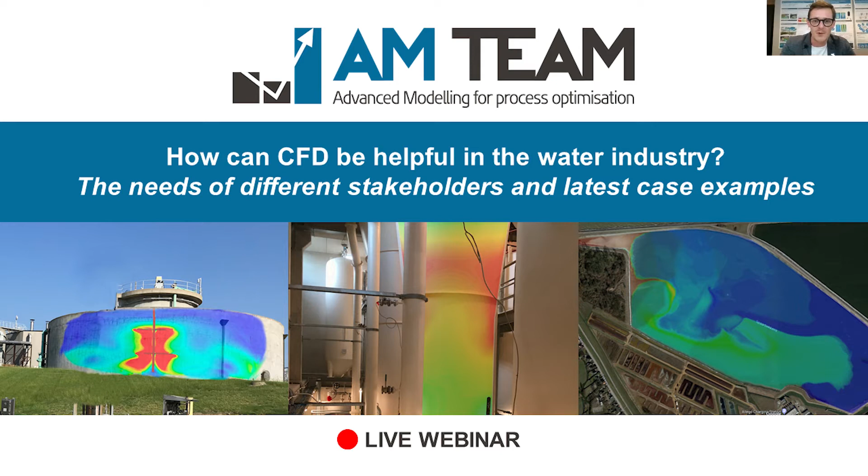Of course, what is also very important is that we show you the latest case examples. This is very valuable to inspire you with what is actually possible today. So this is a live webinar - this is no fake, it's real stuff, so we can actually interact live today.

So what are today's objectives and content? Just to put the expectations right - what is the objective? By the end of this one hour webinar, you know how CFD can be helpful for your case. This is actually the why - why should you be doing it, or how can you actually benefit from CFD, and who?

This means depending on the target audience you belong to, the target group, you might have different benefits. You can also make best use of it in your specific situation, because maybe you're in a design stage, maybe you want to optimize something, you're scaling up a process - it is very different. So these are points we will be addressing in this webinar.

The target audience is actually non-CFD experts. We know we have a couple of real diehard CFD fans here - well, just get inspired by the applications, but for the details on the models, more details on the cases, I would really recommend you contact us or go to our website and read our blogs, okay? So this is all about the applications, and we will not really scare people away here with formulas.

What is the content? We will discuss the needs of different stakeholders, some common misconceptions and must-knows about CFD. We interact daily with the industry, running a huge amount of CFD projects at the international scale, and we see quite some patterns. We thought it was very important to bring forward these patterns and address some of these big misconceptions.

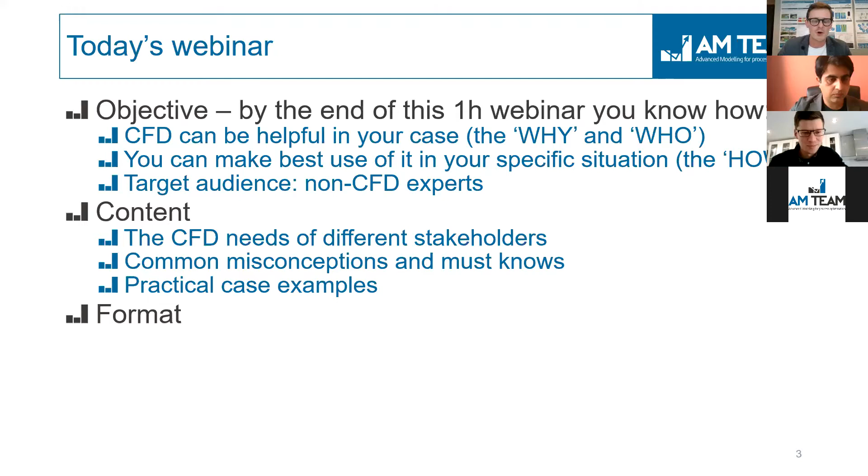The format is slides, so this is the slideshow. We will have a couple of presenters and one moderator, and we will have live Q&A.

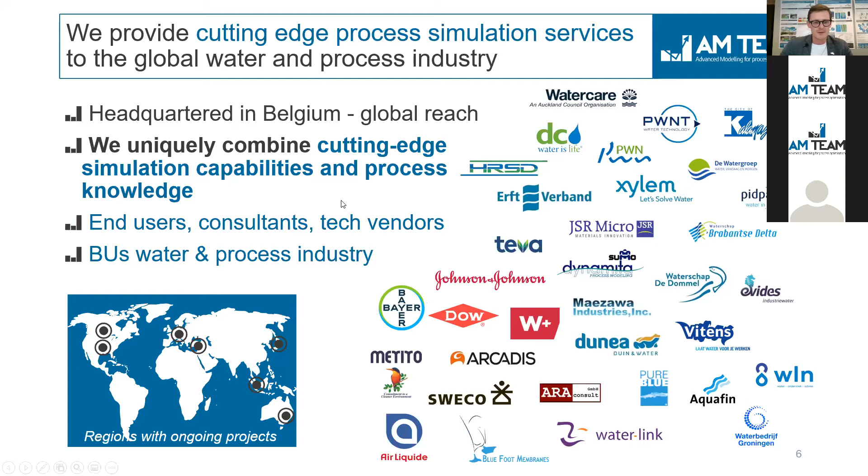So our customers are all over the globe, as I mentioned already. Nowadays, in this digital era, it's very easy to actually work remotely. Okay, let's enter the content here.

CFD easily explained. These are some basics that are really fundamental for you to get everything we will be touching upon in this webinar—we have to start with the basics. You should have a basic understanding of what CFD is. CFD, Computational Fluid Dynamics, is actually a physics tool by heart, so the core is really physics equations. We will not put them on the slide here—they are quite sophisticated, but luckily there's very good software to solve these equations.

It's not a trial and error process. What we mean by that is it's a physics model that is by nature quite accurate if you apply it properly, and then you can structurally apply it to get to your goal. One example on this slide is an existing system. At the left, this is a wastewater treatment plant. It can be any system—drinking water, storage basin, whatever. In this case, it's a reactor. It can be an existing or a non-existing system, because the reactor doesn't have to exist.

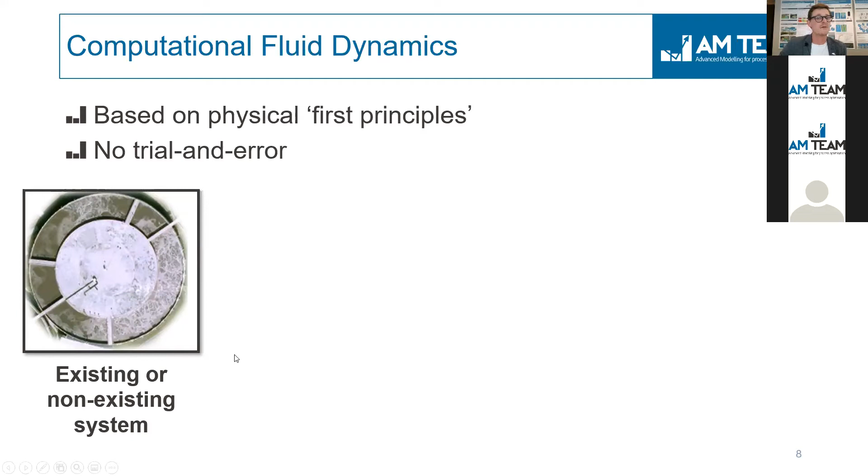The first step you do is build a 3D geometry. So you construct a 3D geometry that is quite simple actually, it doesn't need a lot of input to make. And then you include the relevant elements. What are the relevant elements? Inputs, inlets, outlets, aerations, aerator locations, mixers if there are any, etc. These are the critical elements.

Then we mesh it, so we divide this reactor into little cells. For example, if your reactor is 1,000 cubic meters, and you have 1,000 cells, the average volume of one mesh cell is 1 cubic meter—that's how it conceptually works. And then finally you get the nice colorful drawings most of you are probably familiar with. It's the output, and the output can mean different things.

It can be the most conventional output, a dead zone, velocity vectors, but it can be 3D concentrations of oxygen, ammonia. It can be particles, sludge, gas holdup, viscosity. It can be lots of things, actually. But we will not go into detail in this webinar because this will lead us too far. We have a lot of webinars and other content on our website if you're interested.

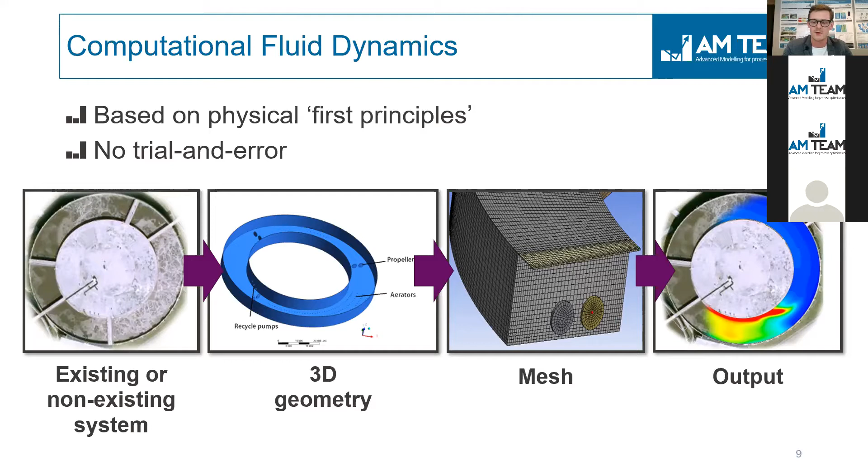But this is the interesting thing when you look at CFD. When you have this output, you see things that are not optimal. In this case, you can see there's a red zone. Actually, this red zone indicates local high dissolved oxygen. It's all concentrated at one spot. You don't want it there.

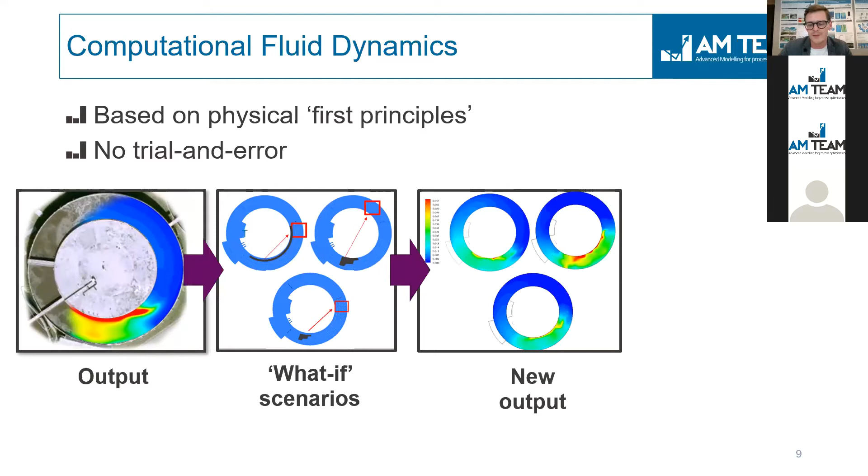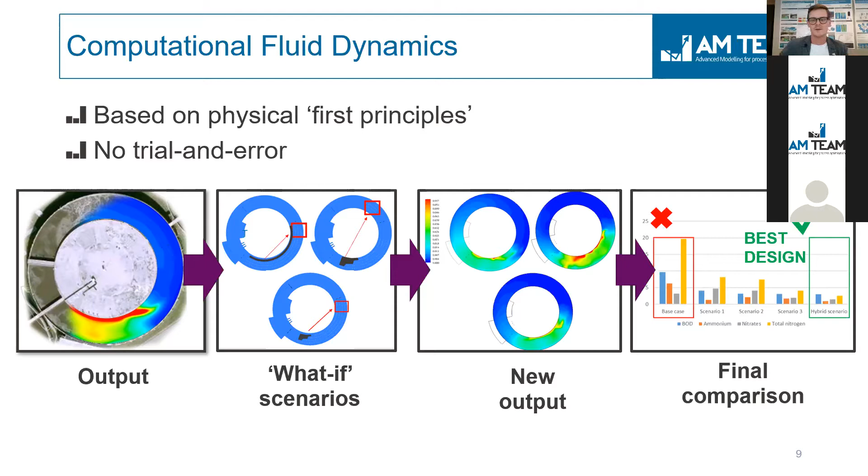So you can do what-if scenarios while not having to actually do any modifications or tests with your real system. And then you can do, again, some simulations and visualize what's better. And finally, you find the optimal solutions or the final optimal designs that can be brought into practice. This is conceptually the core of the value CFD brings: testing flexibility and being able to really understand how you can properly design and operate your system.

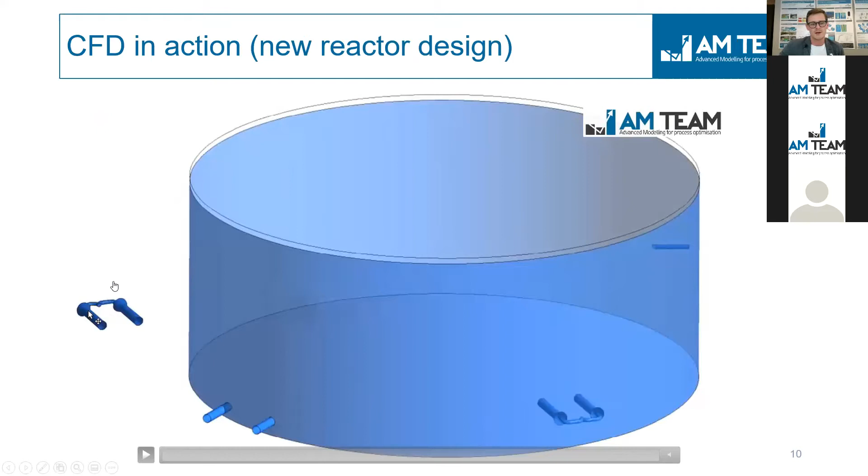Let's make it very concrete and start with a very, very easy to understand example. This is a bioreactor, circular one, and we are putting in some pure oxygen aerators. In this case, they are Ventoxal units, from Air Liquide. There is one pair actually, one here, and we will put them in. We put them in the system, and then it's a 1,500 cubic meters reactor. They inject oxygen, and let's look at the velocities.

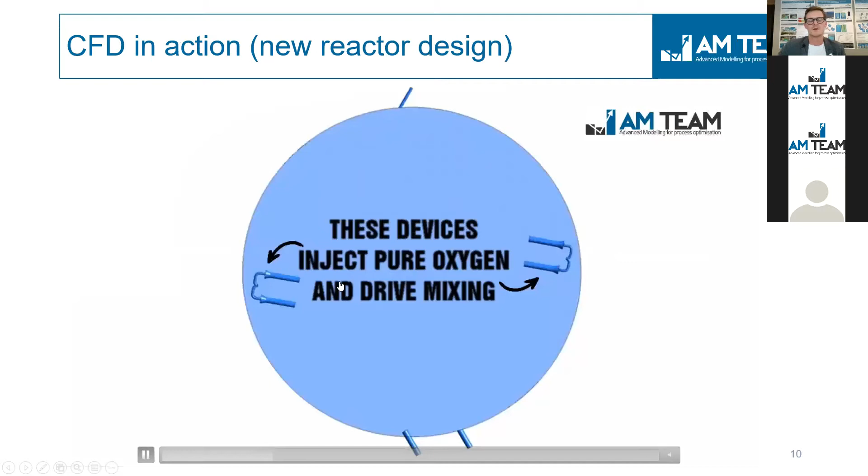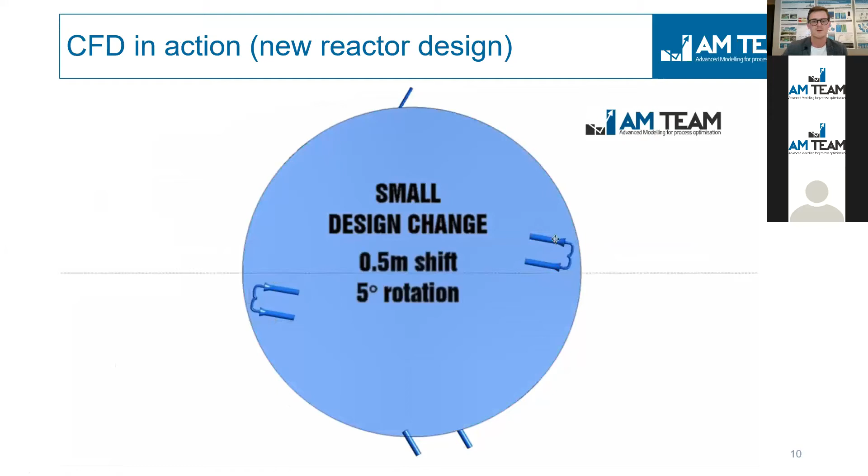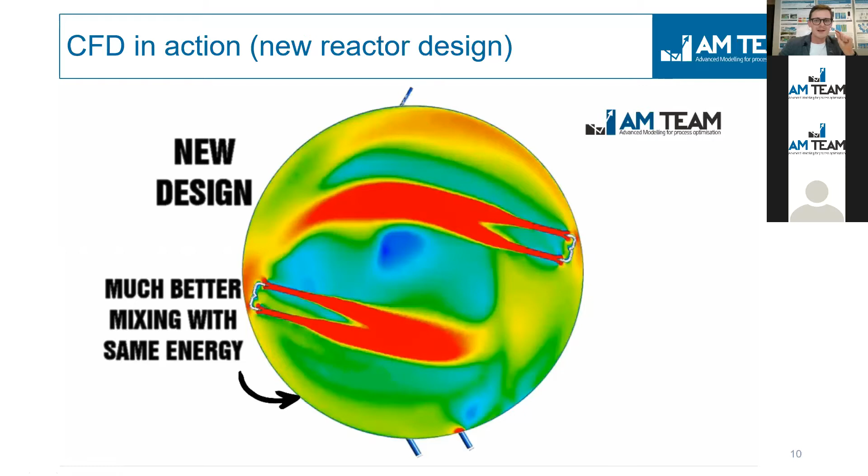So what we have done in this case, we have identified this, and this is how these what-if scenarios work. Let's move these aerators by 0.5 meter, rotate them 5 degrees, and look at the resulting design. And you can see actually with the same mixing energy that now your whole reactor is moving. Same mixing energy, no dead zones, just by slightly tweaking the angle of your equipment.

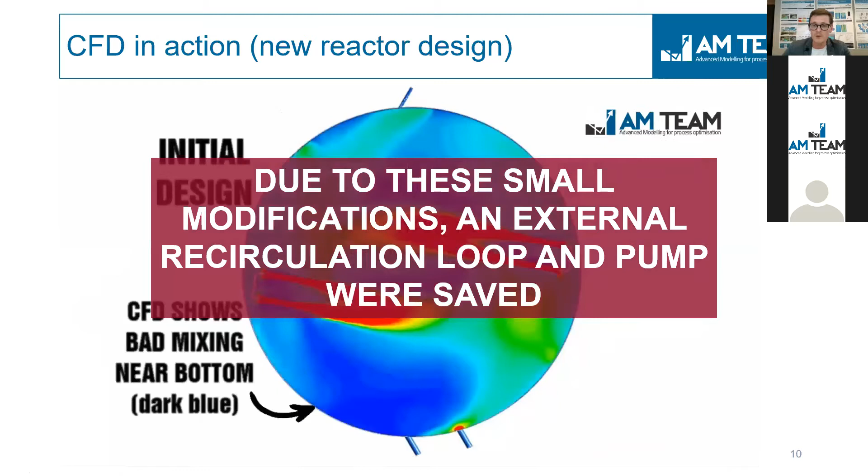So in this case, actually, the major gains were due to the small modifications; in this specific case, an external recirculation loop and also a pump were saved. So there was sufficient mixing. It illustrates the value of CFD in this very simple example. More to come, of course, more to come.

Let's go back a bit higher level and ask ourselves the question, where to apply CFD and who can benefit from it? We actually see 3 main phases. We have the technology development stage, the design stage, and when a system is built and operating, the optimization and retrofitting stage. Each of them have very different needs, but each of them can benefit from CFD.

You can see the target beneficiaries or target groups that can most benefit from these domains. For example, it makes sense that technology development is most related to technology developers and vendors. While if you look at design of big systems, it is mostly the consulting and engineering firms that are working on it. Also, some utilities and industrial end users are directly doing it themselves. And then you have the optimization and retrofitting, which is mainly utilities and end users, but also to some extent, consulting and engineering firms. And the questions are different.

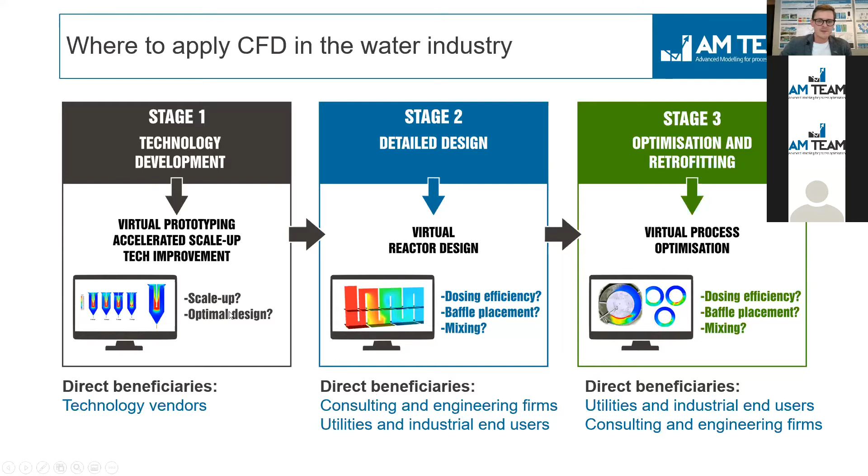You can see them on the screen. You can do a lot of simulations to actually answer questions on scale up in this phase, or efficiency of the process, mixing, in the other phases.

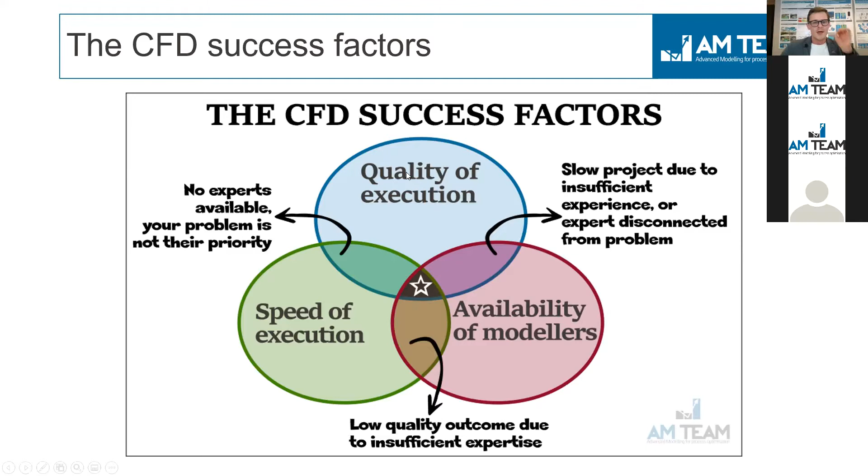On the other hand, you cannot wait for a year, so you also want speed. You want a person doing the CFD that can deliver quality but also speed - you have to understand the process for that. But that is still not sufficient, because we have many customers with in-house CFD experts who complain that those experts are not available - they cannot reach them because they're working on tons of other projects. So you also need the availability of the modelers. If you have these 3 combined, then you have a successful CFD project.

What are common misconceptions? This is a nice comment we got on our Facebook channel. We asked, what do you want to know about CFD? One person, who has a lot of experience in the water industry and said count me in for the webinar, replied that the ROI of CFD must be more clear and access should be easier, in order to make it a standard mainstream application in the water industry. So if we can demonstrate that it's more than just fancy and colorful drawings, it should be a no-brainer. This is really our goal.

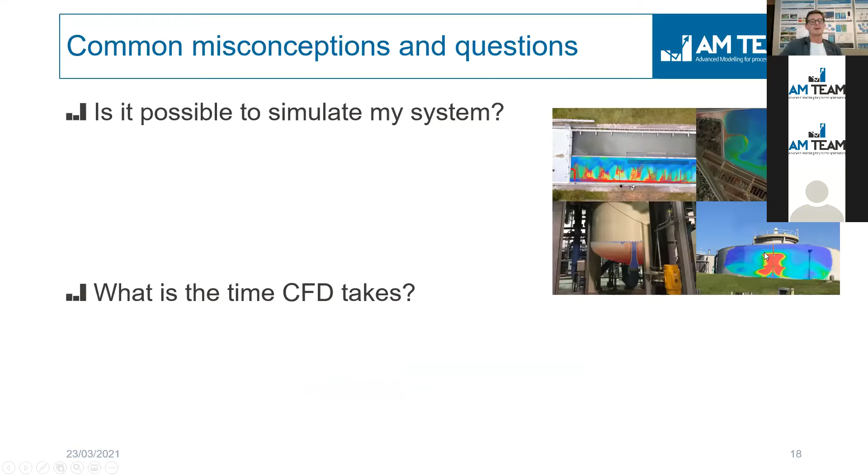We hear this from a lot of people, and this is our goal - to really address this in this webinar. A second question people have is: is it possible to simulate my system? What can CFD actually do? To address this, we will quickly show you a list of which things are possible.

It's not limitative, but you can do one phase, just water, mixtures of water and gas, water and solids, or 3-phase water-gas-solids. One example is an anaerobic granular sludge reactor, another is the backflushing of a sand filter - these are 3-phase systems, and there are many others. You have special viscosities like anaerobic sludge, CFD coupled with kinetics, chemical or biochemical conversions, and a scale from millimeters to kilometers, to millions of cubic meters. We really want to stress that there is no real limitation on the size and type of system you have.

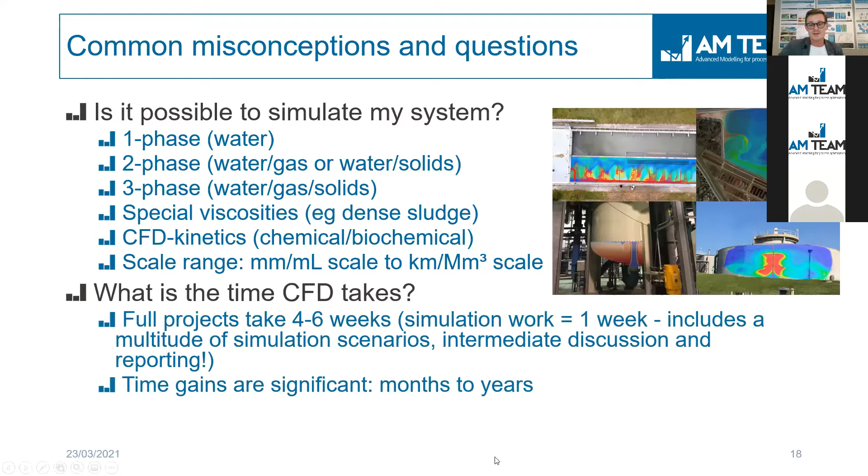What is the time CFD takes? Full projects take 4 to 6 weeks on average in our company. But I must say it's not the simulation work mainly - simulation work, talking with the team, is mainly 1 week, putting in the simulations, post-processing the data. Let's say 1 week out of these 4. The rest is discussion with your customer, gathering data, and things like that. But you can see that typically we are talking about weeks, not months, and for urgent projects, we finish within 1 or 2 weeks if it's really needed.

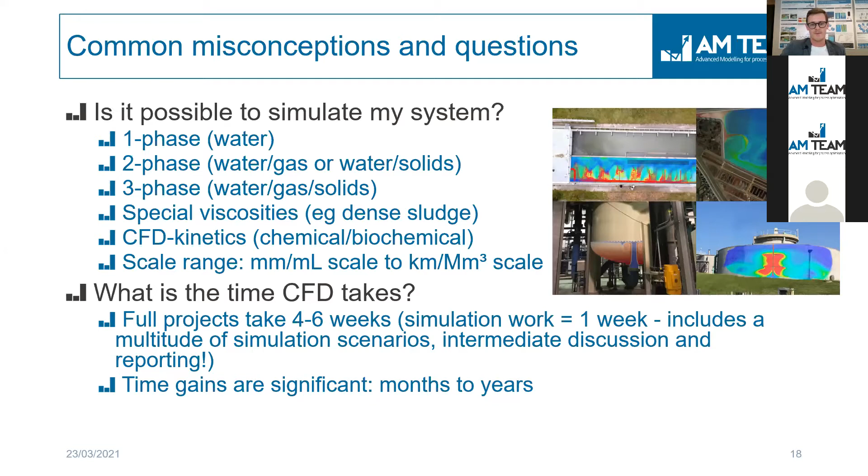Time gains are significant in proportion to the time investment - that is really clear. Another very important point, and I'm happy to see the majority of you is consulting and engineering firms: outsourcing versus doing it in-house. A question we get a lot from our customers is what CFD strategy we should actually pursue in the future.

Adequate CFD equals a full-time job, so we don't really believe you can do CFD properly - meaning with the right level of confidence so you can take weighty decisions - if you're not doing it full-time. Even then, you can have a full-time CFD expert, but this person has no critical mass. Our co-founder Usman Rehman, the CTO of our company, said going to a Fluent forum is not sufficient. You need to be able to discuss with your colleagues - you need a critical mass because it's not easy, right?

It's a specialist craft, and you need to have the relevant experience. If you're able to model HVAC systems - heating, ventilation, air conditioning, which is air simulation in buildings - that doesn't mean you're capable of adequately modeling an aeration basin, which is a 2-phase process in a wastewater treatment plant. This is really key.

We thought it was so important to put this on the slide. You can compare it to an IP lawyer - you want a lawyer, right? An IP lawyer doesn't equal an employment lawyer. Everybody understands both are lawyers, they have similar backgrounds, they use similar tools, but what they are capable of doing is very different. People in the water industry need to understand this, because otherwise you cannot make the right decisions or judge what is proper quality.

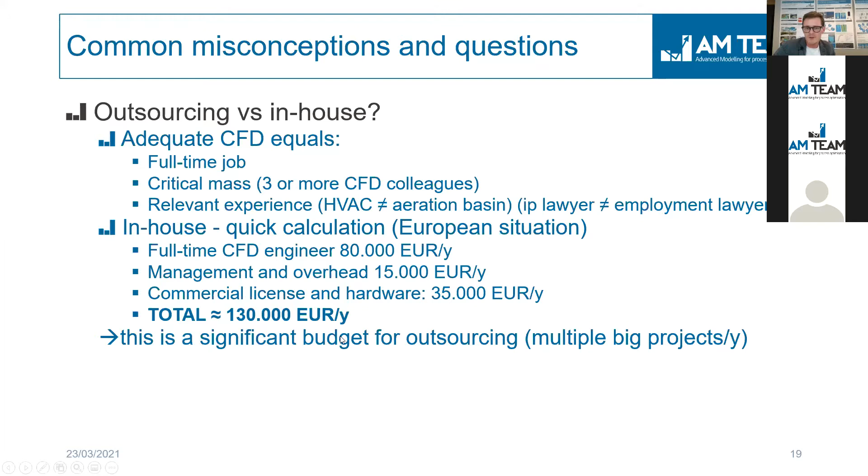If we look at the projects, our big customers are customers that have multiple big projects a year. This is a significant budget for outsourcing - with multiple big projects a year, you can actually outsource.

If you have an in-house expert, there are some other risks to consider. Will the experts be available? Also keep in mind, if you have in-house CFD expertise, management will not easily give you permission to outsource additional CFD to a specialist party, because for many people CFD just means CFD. It's very difficult to judge the quality and state of the art if there's just 1, 2, or 3 people in your company doing it. There's a lot to it - we're not judging too much here, every situation is different, but these things are very important to realize.

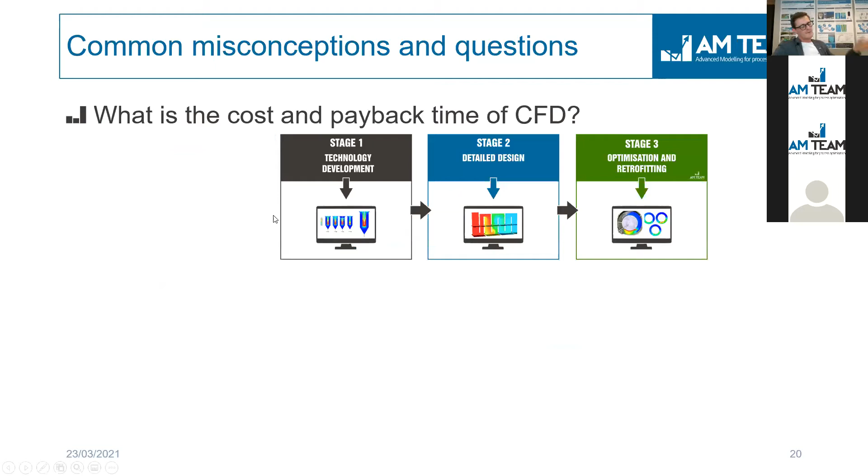Final question: what is the cost and payback time for CFD? Typically, in these 3 stages, it can vary a bit - you can see the range is very wide, it depends on the project. You have entry projects that can be 5K, 8K, and then lots of projects that go up to 60K. In optimization or retrofitting, it's maybe a bit less.

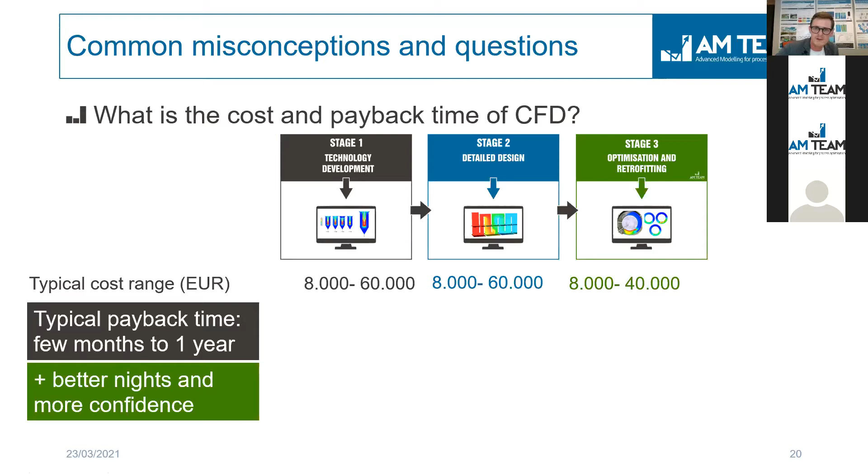But apart from price, what's most important is the payback time, and typically we talk about a few months to 1 year of payback time, if done properly. Apart from the financial benefits, of course you have better nights and more confidence. We were joking today that CFD is also known as colorful fluid dynamics, or colors for directors - well, we'd like to add confidence for directors. This is so key if you build a big plant.

3 concrete examples from our customers. We could actually avoid installing a large baffle for a drinking water company - not having the baffle there provided better mixing. It's a bit counterintuitive, but it led to a cost saving of 20K, and the cost of the project itself was less than 20K.

Another example is saving a year of piloting - the project actually paid back at least 3 times for this technology developer. These are savings of more than 100,000 euros when developing or scaling up a technology.

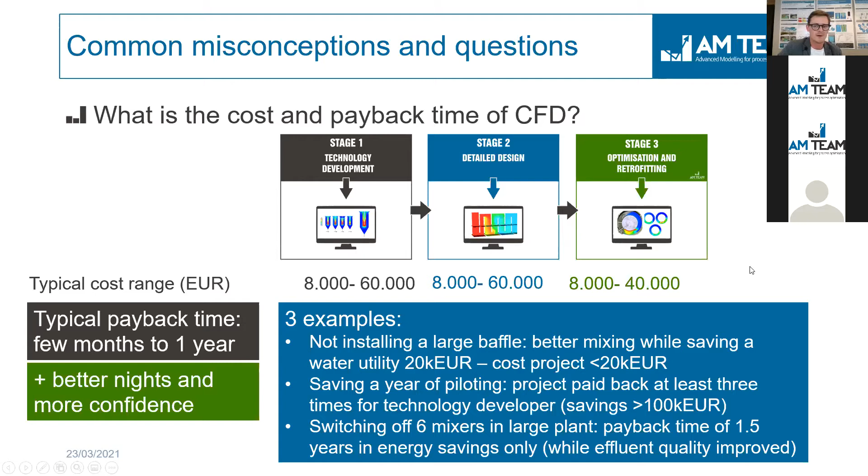Then we have an operational plant where switching off 6 of the mixers led to a payback time, from energy savings alone, of around 1.5 years. But the main benefit was actually improved effluent quality, and this was the main reason to set up the project. So these are very concrete case examples, ballpark.

So first is technology development. We gathered a few cases. For technology vendors, there are a few things which are very useful for them, and the most important is how you can accelerate your technology development. CFD can really minimize the time to market, significantly reduce costs related to piloting, experiments, or technology development. It also gives you huge testing flexibility, meaning you can do all types of configuration testing, different operational testing, what-if scenarios, to really increase the application of your technology. On top of that, it provides a lot of insights which are normally not possible with experiments or measurements alone. So overall, there are a lot of benefits for technology vendors - it saves cost, time, and leads to more reliable process performance, additional confidence, and new insight.

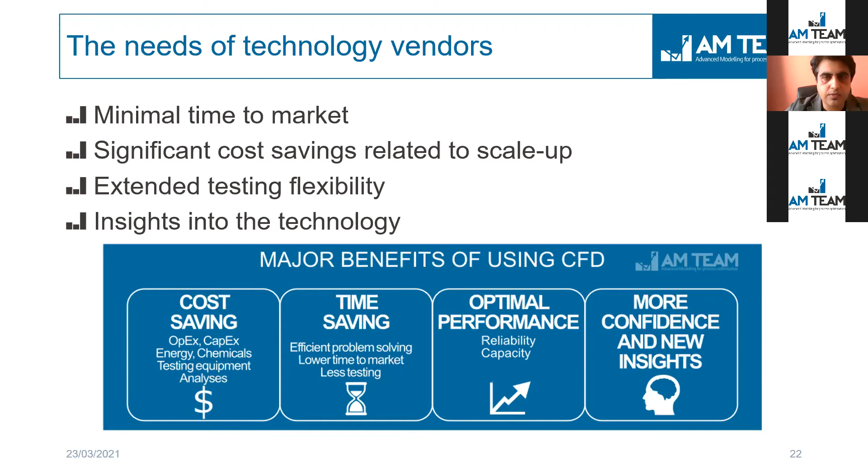So I will start with one example. In this case, the client is a Japanese client who was constructing a pilot for an MBR bioreactor. They had a very small lab scale bioreactor which they wanted to scale up to a demonstration scale - almost 30 times more than their lab scale. This is a huge transition, involving a lot of expenditure if you have to do it stepwise, building it and then retrofitting or optimizing the design.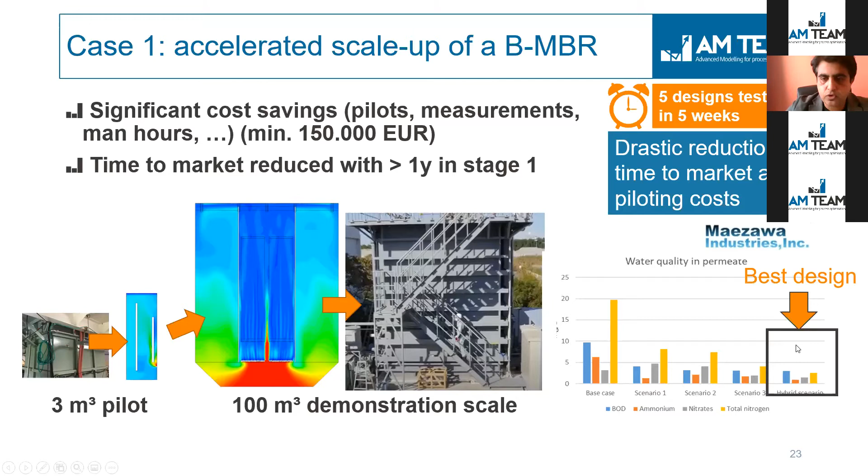So what we did in CFD was start with the lab scale, validate the CFD model, then move to the large scale, and test several configurations to come up with a good design that would optimally perform. This CFD modeling helped them save a lot of time, with a drastic reduction in time to market for this technology. We tested around 5 designs in 5 weeks - that's the order of magnitude we were working in. So this was the final design which worked best for the client.

In this example, this is a prototype of a tubular membrane.

In this case, it was very interesting because the client already found out that there is a certain design of the tubular membranes which is working, but they didn't know why it was really working. So for that reason, we performed CFD simulations and figured out that the helical ridges, these are very small tubes of 4 or 5 millimeters, can really increase the shear stress inside these membranes, which means it can clean the membranes very fast and increase the performance. So we can see it on these curves, the Rehman-Nopens curves for the shear stress, that the red curve, which is for the helix case, is on the right, meaning more shear compared to the plain case.

So this was a very interesting study. In this case, we had 3 designs which were tested in 2 weeks, more or less.

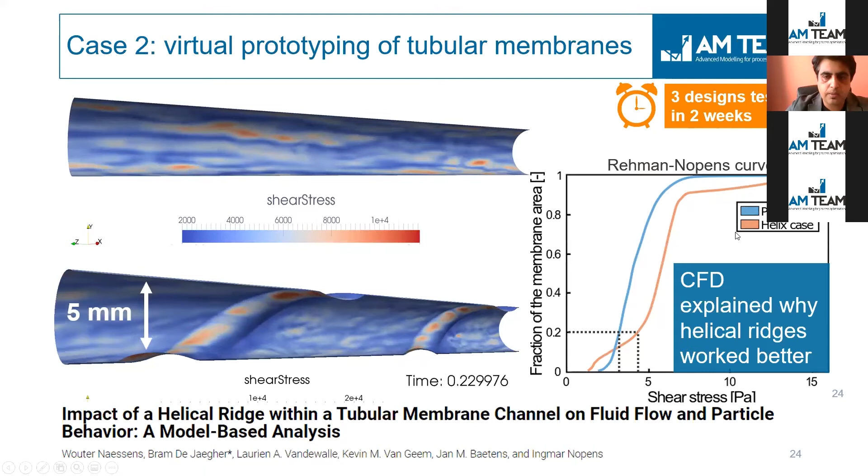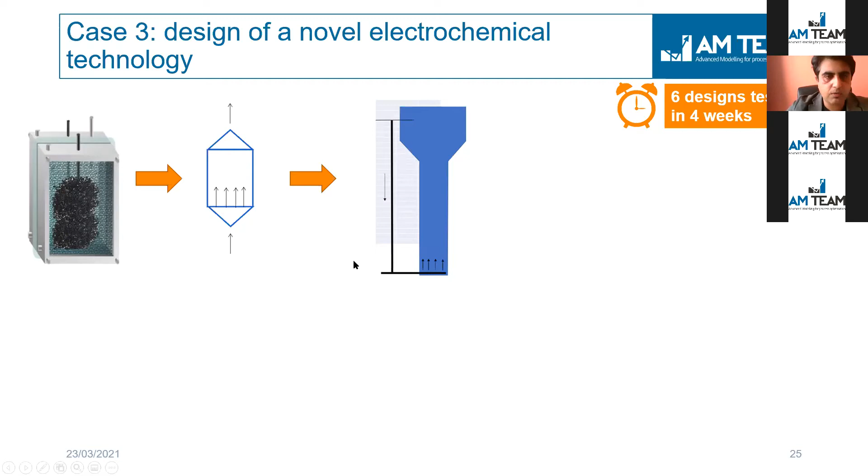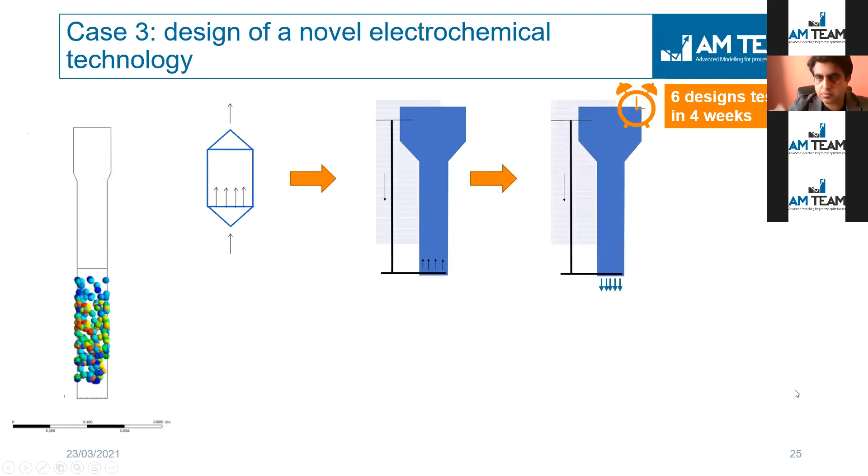So this is another example, a novel electrochemical technology. In this case, the idea is that we fluidize the particles using water. As you can see, the particles sitting at the bottom of a reactor, if you are pumping water from the bottom, it will probably be very hard to fluidize them upfront. So we started using CFD modeling for that, and we figured out that if we just go by the general engineering design, the particles were not really suspending, they were just falling, as you can see here. So we tried to make some design changes, for example moving the liquid inlet from upwards to downwards, and see if it can help.

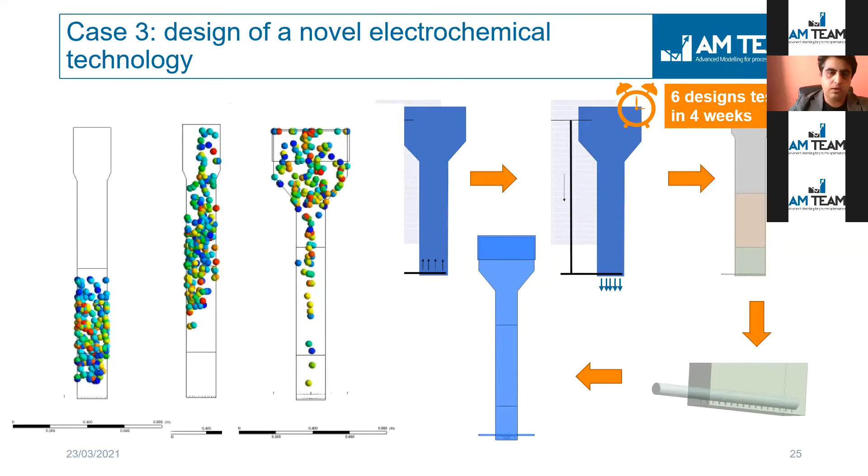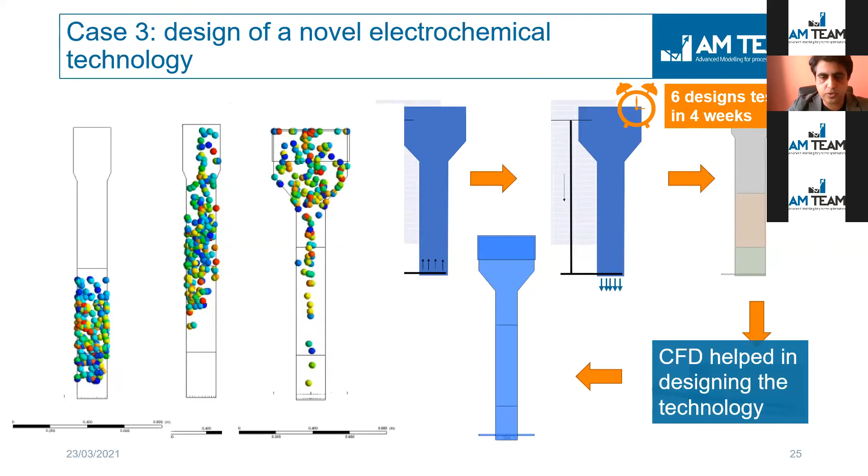So this is a very good example where we started from a very basic idea, and then we implemented the whole design, developed entirely in the CFD. In this case, we tested around 6 designs, and it took us around 4 weeks. So in this case, really CFD helped in designing.

Okay, so the next stage is normally where the more engineering firms are interested, which is about the design of large scales or real scale facilities. In this case, I think CFD can really support the engineering practices. It can support the design decisions which designers make based on normal engineering practices. CFD can really confirm some assumptions and hypotheses, and give you confidence in your design decisions. It becomes even more important if you have risky processes where you are limited with respect to space, for example, or in general the footprint of the technology. It also provides you, I think, with the competitive edge, and eventually the end user becomes much happier. And then I think for engineering firms, it's also good to have a reliable CFD party which can provide much better project understanding. So I think, again, all the benefits are there for the engineering firms in this aspect.

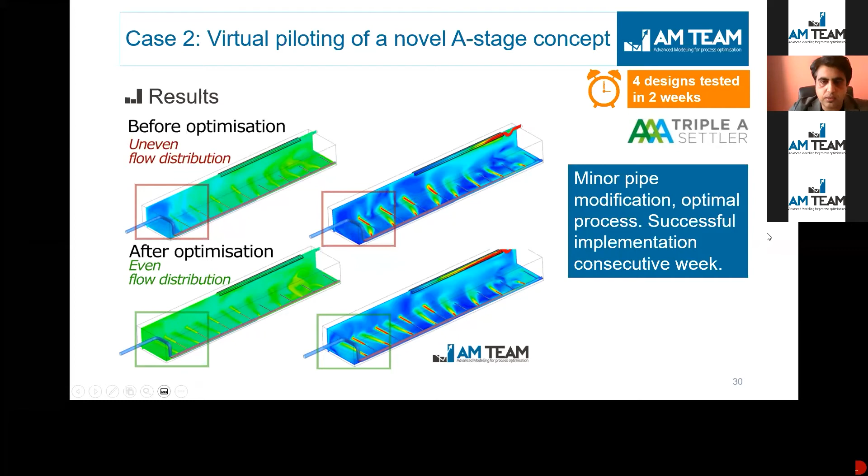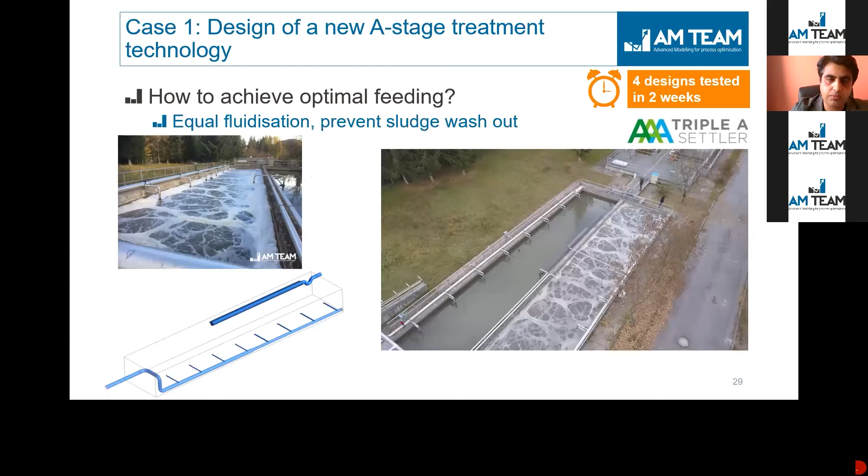Usman, if I can just jump in. A question came in about the MBR example - if our models are coupled with ASM like wastewater treatment models, maybe that's a good one to answer now. Yeah, indeed they are. In this typical example, we were able to bring more confidence for the end user because it's more accurate. Sorry, I will just try to get it to the right slide.

Is that the question, Celia? Yes. Yeah, I can add something to that, Usman.

What many people are familiar with is velocity fields and mixing, generally using CFD for mixing - you can have a dead zone or bad mixing or poor mixing or suboptimal mixing. But in the end, what you are really interested in as a process technologist or process engineer is the impact of that dead zone on your process performance. By integrating the kinetics directly in CFD, which we do on a routine basis for many customers, you can go a step further in the optimization, because it's not always that straightforward what is bad mixing or poor mixing or good mixing - it depends on your process.

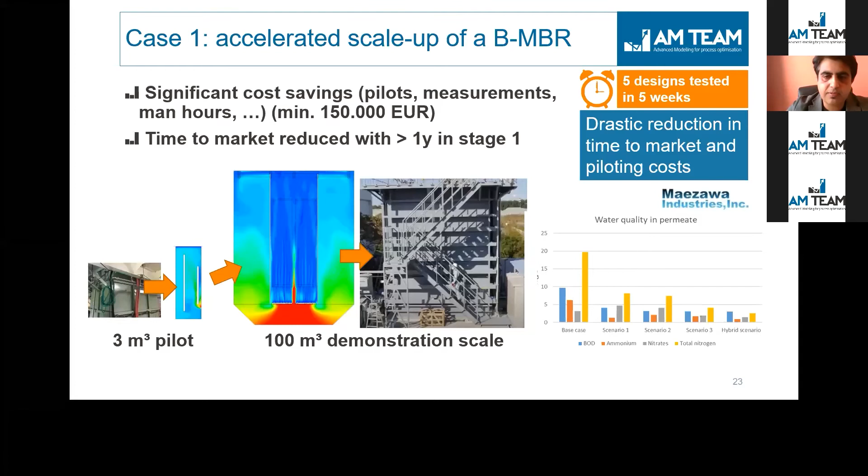Okay, I will try to get back to where I was.

Here is the example of a sand filter. Sand filters during filtration are capturing the pollutants on the top, and then there is backwashing to get rid of the pollution from the top. The backwashing is complex because you have water, you have air, and you also have sand. The problem is that if you don't have homogeneous backwashing, you might either wash out your sand, or you don't wash out your pollutants, which are normally in the sand during the first stage.

In this case, we modeled the backwashing to see how the fluidization of the sand is happening. I will run the animation. You see this is the sand fraction, which is being fluidized first with the water, and then at some point air will turn on and you would see much faster fluidization.

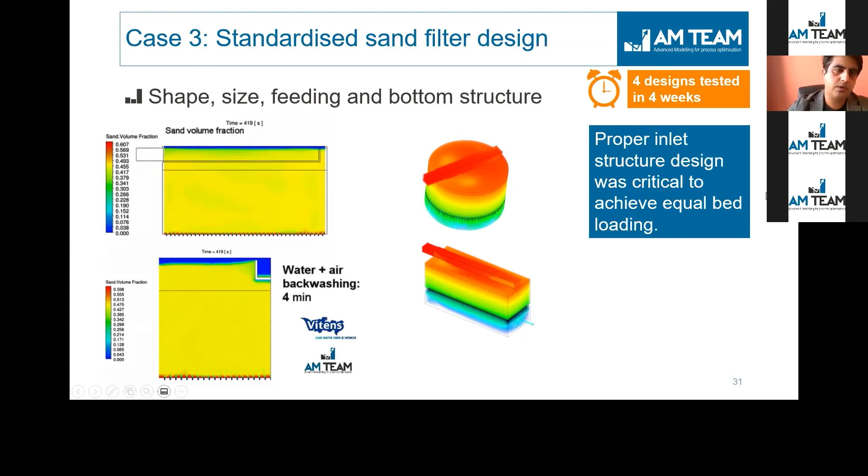In this case, we were comparing two different designs and looking at the inlet location, what is the better position of the inlet, such that you get the best performance of the sand filters. We tried different designs, like 4 designs in 4 weeks, and eventually we were able to figure out the best possible configuration for the sand filter for different structures.

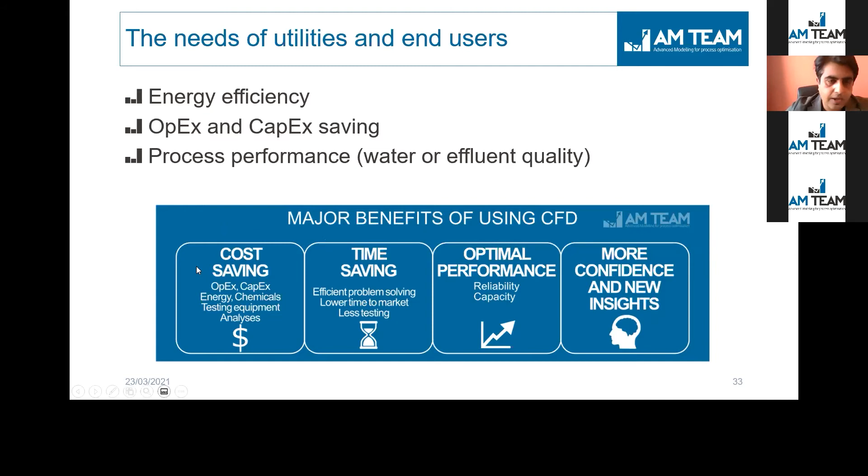The last stage, which is more for the end users and utilities, is optimization and retrofitting on large scales. I have a couple of examples for that. Normally, for the end user, it's important that they are not overspending energy. They want to be as efficient as possible with energy use, and they also want to reduce as much as possible OPEX and CAPEX. On top of that, they want their process performance to always be optimal with no problems. So they can benefit from all these different options by using CFD.

The first example is a homogenization tank, where the client was looking at sludge mixing and trying to avoid struvite accumulation in the tank. Struvite happens to be very fine particles which can accumulate and give you headaches later on in the sewage treatment process. So they had a tank causing problems with struvite accumulation, and one solution was to achieve better mixing by installing extra propellers.

Initially, the plan was to have 2 propellers on the side to keep the whole tank in motion, with the liquid completely revolving. But then we figured out this wasn't enough, and you need a central mixer which can provide vertical flow so there's enough suspension of the particles. We tested several designs, for example 6 designs in 6 weeks. Looking at these 2 figures, on the right side you actually have 3 impellers: 2 side impellers and 1 in the middle. The only difference between the right and left figure is the angle of the outer impellers.

The moment you turn the impellers so that they start synergizing together, the central impeller and the flow caused by the outer impellers work with each other instead of counter-flowing. In the right example there was a counter effect, while in the left example they are more in synergy with each other. You can see this in the next slide.

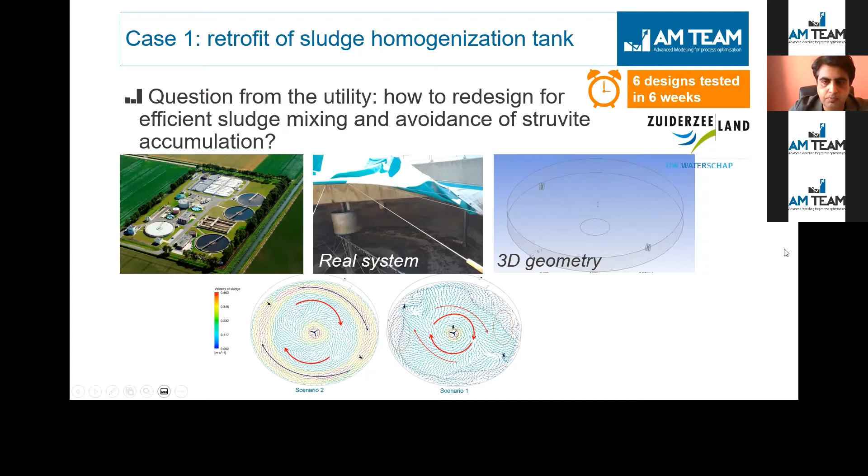Here I'll run the animation for 3 different cases. This first case is when you just had the outer impellers. In this case, we already had the central impeller, but the angles were not optimal. In the third case, scenario 2, the angles are optimal. You'll see the particles fluidizing. In the non-optimal cases, they don't leave the central part and just accumulate there—this was the current situation. By implementing side impellers you could move them, but they were still caught up in a region where the flow worked against itself.

But in the optimal case, once everything is in synergy, the particles are completely in motion and very well suspended. This was a very interesting project where the client was already going to implement the solution. We helped decide the impeller type, positioning, and specifications.

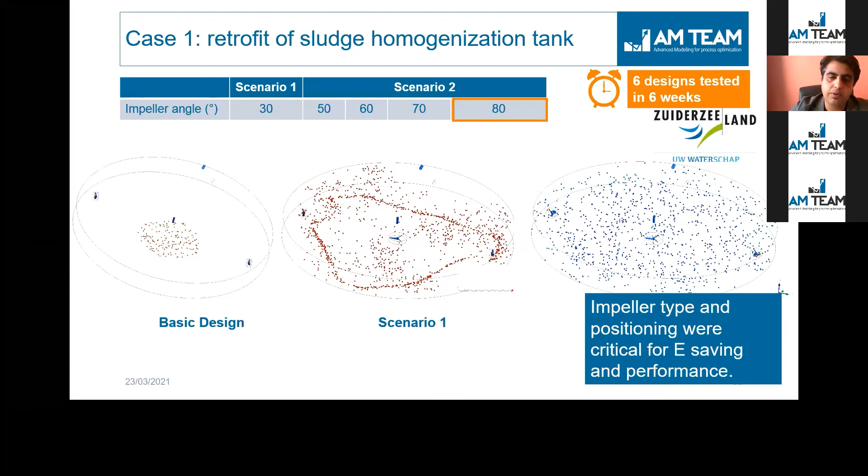Another example—let me go back—is a secondary settler, where the client was looking at increasing the capacity of the settlers by adding some extra retrofitting inside, so they could still have very good settling without compromising the effluent quality, meaning without much more TSS in the effluent.

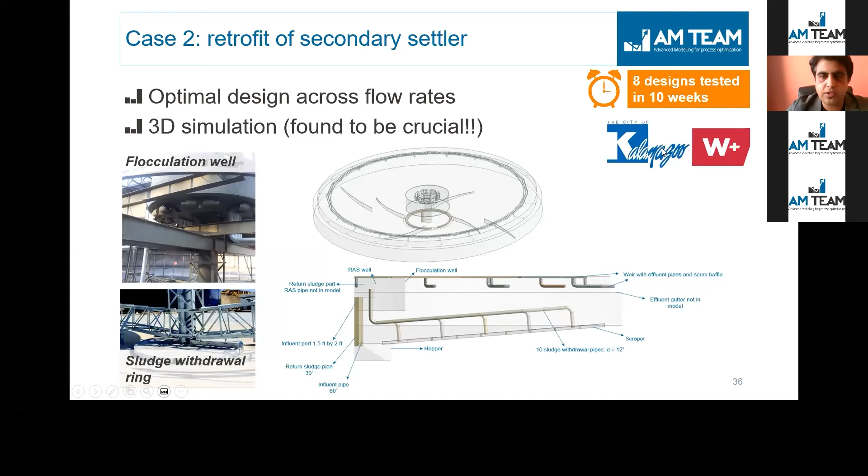The first thing we found in this simulation was that it's very important to do a 3D simulation of the settlers, which is conventionally not the case—usually CFD modeling of settlers is mostly 2D, which only gives some indication. But if you're testing design features in the settler that are inherently 3D, 2D simulations can't account for that. So when checking certain baffles, walls, or withdrawal systems, you have to make sure your CFD system is adequately designed to capture all these details. In this case, we tested 8 different designs over about 10 weeks, and we were able to validate this because it was a special type of sludge.

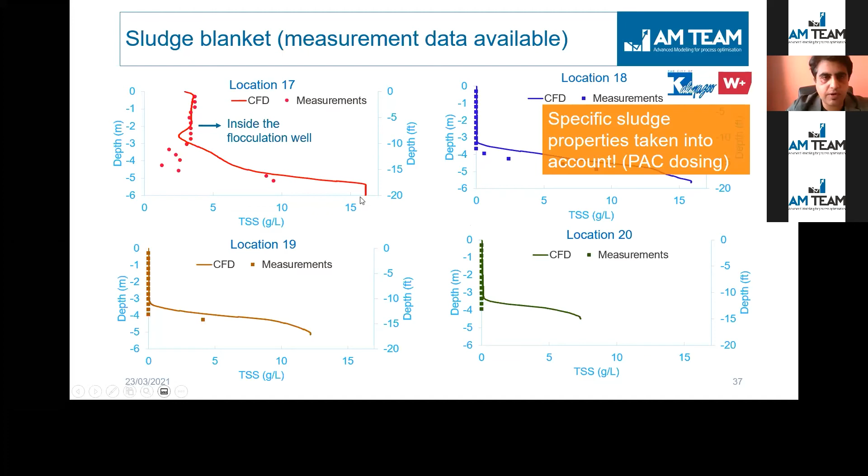So which was where PAC dosing was happening, so sludge was very good and settleable. We tried to validate this with our model, and we found that the CFD simulation results were very much in line with the measurements.

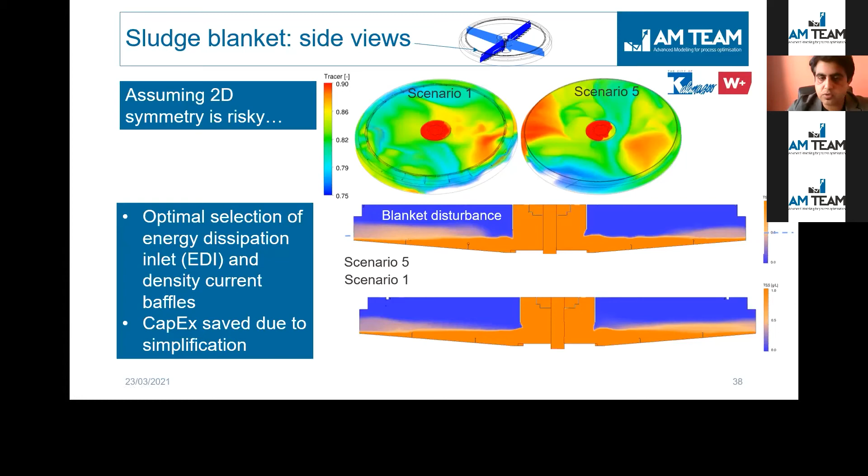We tested different design scenarios and found that scenario 1 was better than scenario 5. This was a very good finding, because scenario 5 was apparently the most expensive option for the clients. They were going to invest anyway, but across different options, there was one which was the most expensive, which in their opinion was going to be the solution. But eventually the CFD simulation showed that this was not really the right approach. Rather, a cheaper option was much better performing. So definitely CapEx was saved in this situation.

Okay, so that's it. Maybe I'll make use of the opportunity to jump in again. A question came in about the fouling mechanism on membranes, if that is taken into account in the modeling, for example the fouling mechanism due to oil adsorption.

Well, not really, not explicitly. The case I showed, the tubular membranes for example, in that case it wasn't taken into account. But the common consensus is the higher the shear, the higher the cleaning of the membrane. So that is something you can correlate with your process. Okay, thank you.

Okay good, we can go to the conclusion section. If there are any more questions, it's now the moment because we have some time left, and after the conclusions we'll go a bit deeper on the questions. So feel free to ask any questions you have on the cases or on the stuff we have presented.

Conclusions. As you have probably seen, we could only select a few cases, but there are so many nice projects, nice different technologies, different applications we could not show but have been working on. You can assume that CFD can be used to model almost any treatment process. It can be physical, chemical, electrochemical, biological, but also other systems, the more conventional ones, flow distributions, storage systems - they can all be readily modeled.

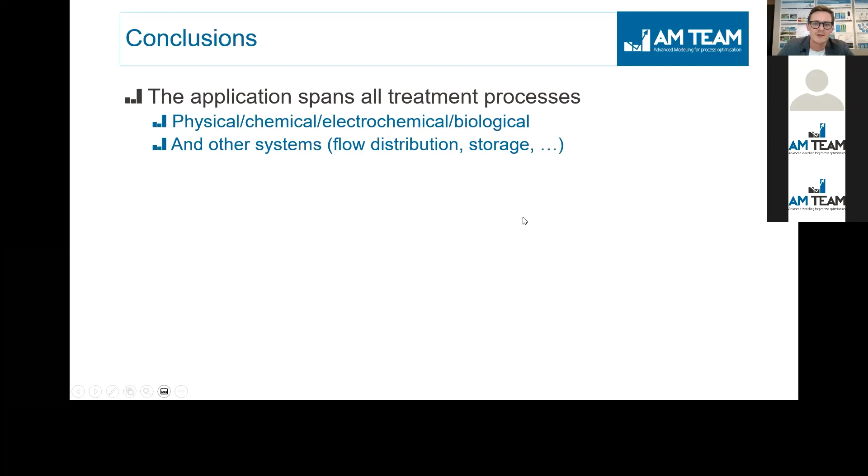The thing is, it's not embedded sufficiently yet in the water industry, and this is one of the reasons we are setting up such webinars, to really spread this message on what's available and what's possible. Each group has different needs and benefits. So all of these, utilities, or chemical companies for example, or consulting and engineering firms, or technology developers and vendors, they are all customers of ours.

The projects look very different. They are all CFD projects, but they all look very different. The speed, time restrictions, the time expectations can be very much different. The in-depthness can be very much different. The number of cases, the size of the project, the approach you have to take - all of these things are very important in projects, and we really try to tailor our way of working to these target groups.

So this is quite important to understand. Often this realization is not really present for many people in the industry. And well, we have seen so many times - I mean, I think our company has now finished around 150 projects, full-scale, pilot-scale projects. The benefits of proper application of CFD are really significant and vast. So these ROIs, these payback times we have shown are not really exaggerated. If it's really appropriately applied with the right level of expertise and experience, you can really do a lot with it. And again, it comes down to these needs of utilities, the engineering firms, and the technology developers and vendors.